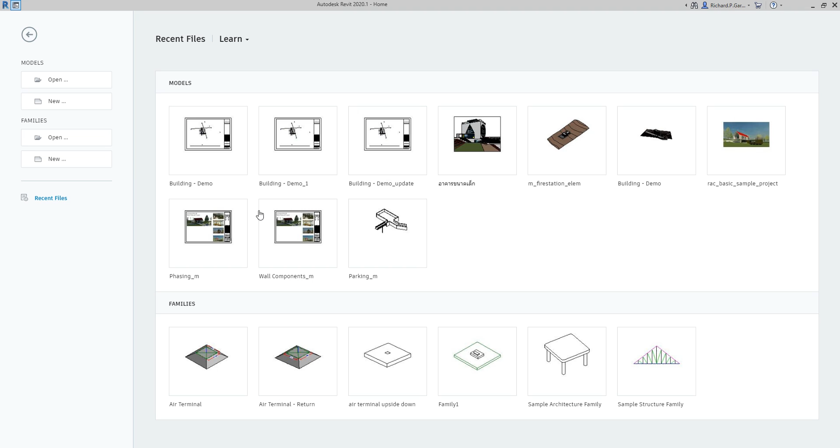Let me just move this away. So what I'm going to do is create a new file or a new project. The project will use an architectural template to start the project. So I select here, OK.

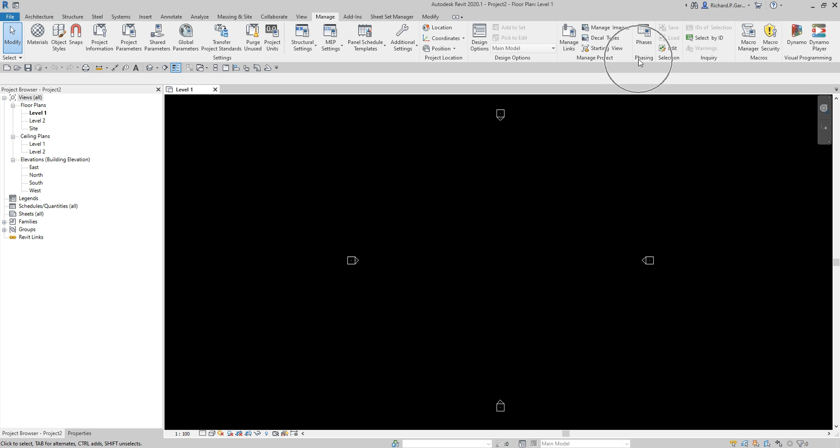All right, before I create the schedule, I'm going to select Manage, and then from the Phasing panel, you can see here the phases.

As you can see on the project phases, I have here two default phases: existing, and the other one is new construction.

So what I'm going to do is change the new construction to be Phase One. All right, enter.

Okay, and then I'm going to create another phase here. To do that, I select 'After', meaning for my number two phase, I select After here to create another one. So that will be called Phase Two. Okay, and so on and so forth.

As you'll notice on the project phases, this first portion here is the past, and the more you add a phase, that will become the future phases. So this will be the old phase, and this will be the newer phase of your project. If I add another one, this is the latest phase, and this becomes the old phase. So you can see there's the past and then there's the future. It's up to you how many phases you want to add to your project.

Okay, so this is just an example, to give you an idea on how to show our wall in different phases. Now the next thing I'm going to do is just select here.

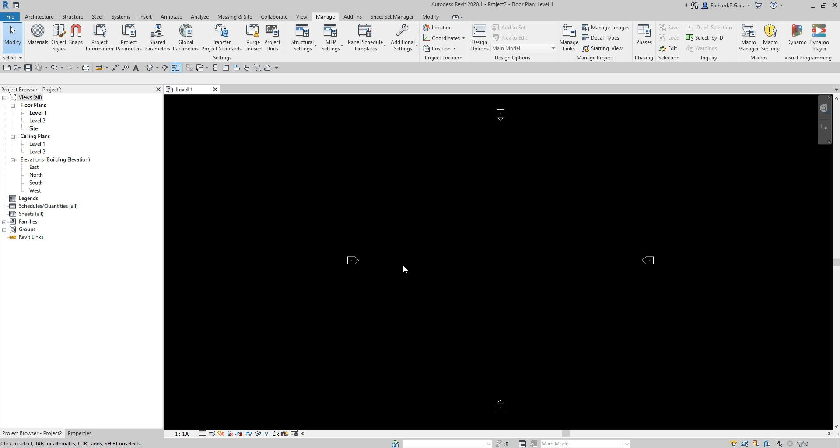Okay, there you go. And then as you can see, if I go to my properties here, I can see that the current phase is shown as Phase 1. So there's the existing, there's Phase 1, there's Phase 2, and I also have here Phase 3.

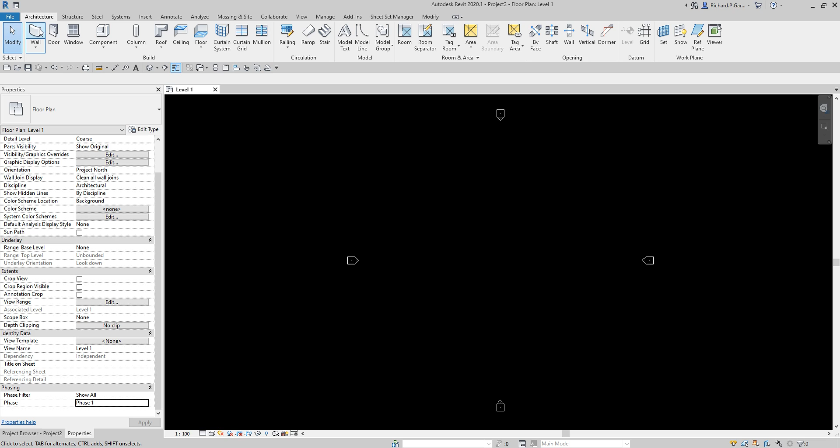Another thing, if I'm going to create a wall here, so there's the wall, I'm going to select that and create a wall here. Okay, so there's my first wall. I'm going to press escape and then just copy this.

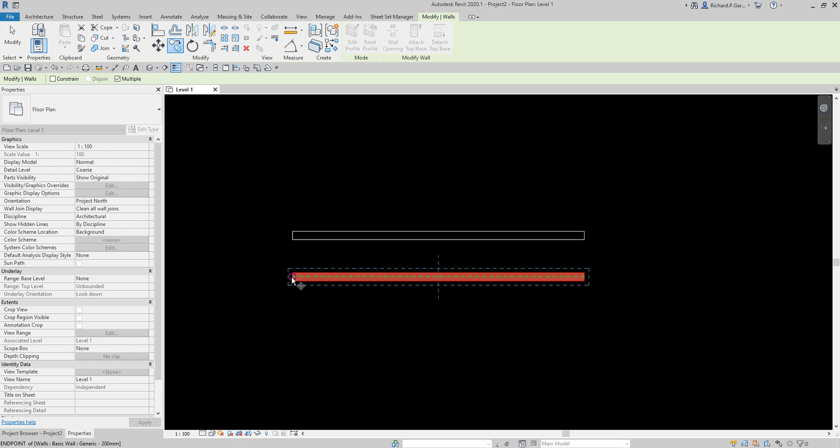So I copy that by selecting and selecting the copy here. Let us copy this. I'm going to make it multiple times, copy it a couple of times. All right, so I have four walls here.

So what I'm going to do is select one of the walls, and as you can see, there's this phase created. As you can see, if I click the drop-down arrow, I can see here all the phases. So what I'm going to do is just apply phases to these walls that I have created.

Okay, so just a bit of background: the reason why you are creating phases is so that you will be aware of what is happening on the project stages of your project.

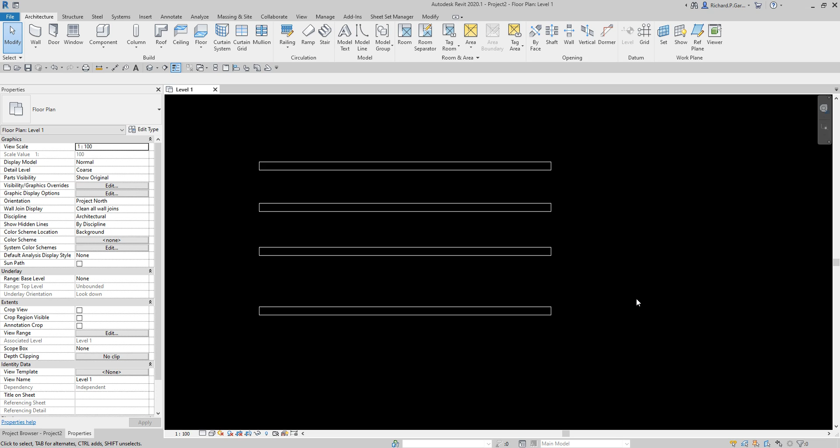Okay, you will be aware of the phases of the project. I'm going to select the first one and assign this to my existing. So there's my existing. Now I'll select this one, which is phase one. This will be phase two of my project, and this will be phase three.

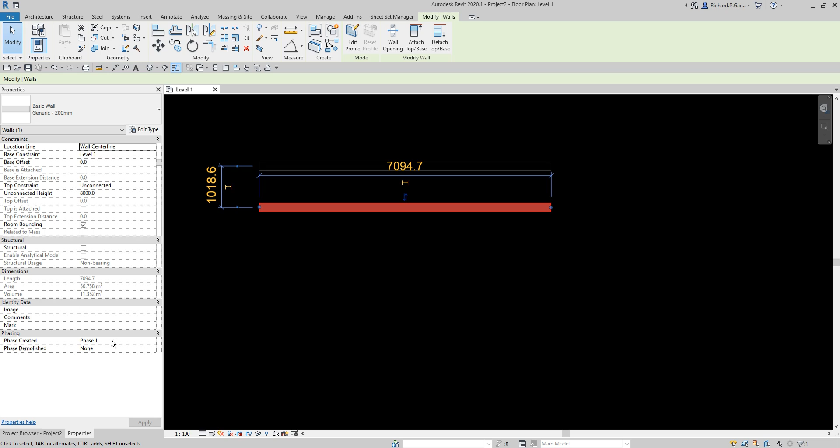So here I have the existing, and here I have phase one. The reason why the other two walls disappear here is because our current phase is phase one.

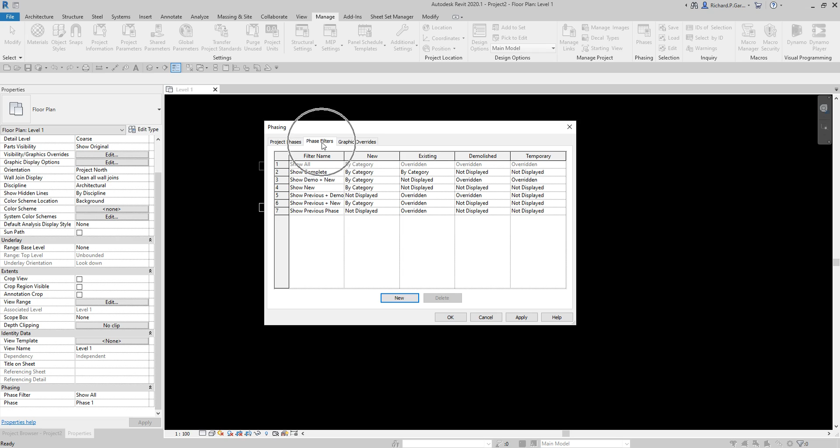If I go back to manage and select the phases again, I'll select the phase filter. As you can see, the phase filter is set to show all. So on my current view, on level 1, the phase filter here is show all. You'll notice that all the new elements by category, the existing is overridden, demolish is overridden, and the temporary is also overridden.

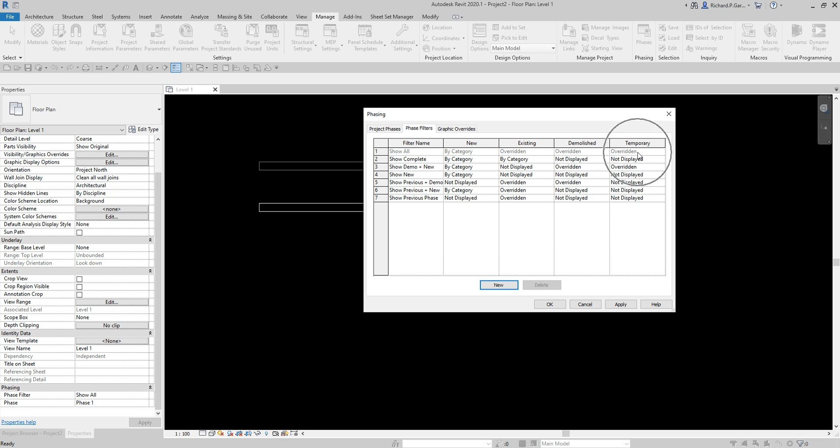Now if I go to graphic overrides, you'll notice the existing is colored gray. So the base of that is existing, and that's why my wall here is gray as well.

So if I change this to, let's say, blue, solid blue, and this one also solid blue. I'll select OK. Remember, this one is existing, right? So if I select OK, you'll notice it turns to blue.

So basically this controls the settings, the graphic overrides of your phases. Now what I'm going to do is for the phase filter, I'm going to select show all, show new... I'll use show complete.

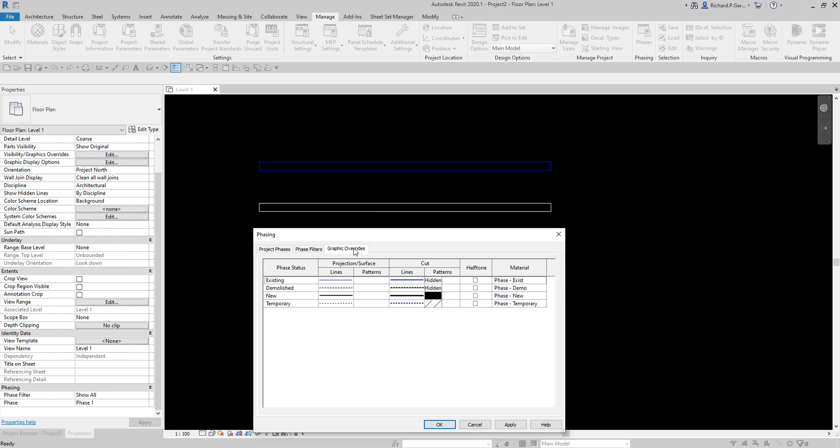So if it is show complete, it will show the new elements and the existing by category. So by category means it's not overridden. If it is overridden, that will be the settings on the graphic overrides. So if it is by category, that is the settings on your visibility graphic overrides. Just remember that.

So if it is show complete, it will not show the demolish, and it will not show the temporary either. So if I select OK, and then after that I'll select show complete, this is now what will happen.

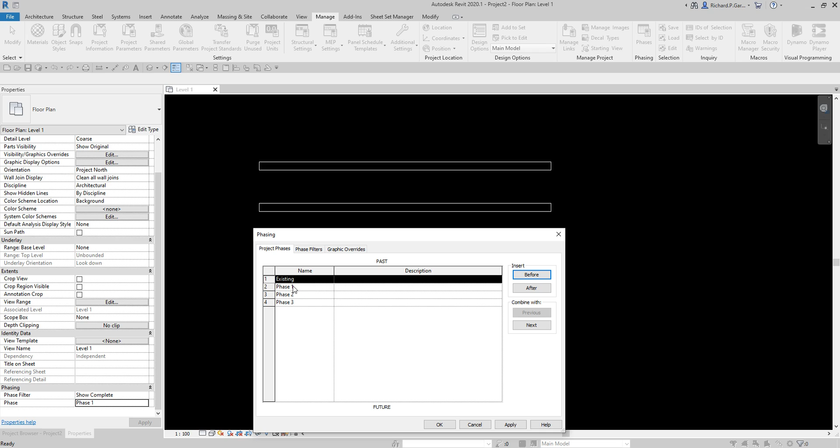So for phase one, like what I said earlier, if I go to the phase, phase one is the newer phase than the existing, right? That's why the existing here is showing and also phase one is showing.

If I change the phase here to another stage, which is phase 2, what will happen is it will show us the third wall. So if I change this to phase 2 and apply, you'll notice it shows the third wall. It's just logical that the future wall will not be shown here because we are only on phase 2 of our project.

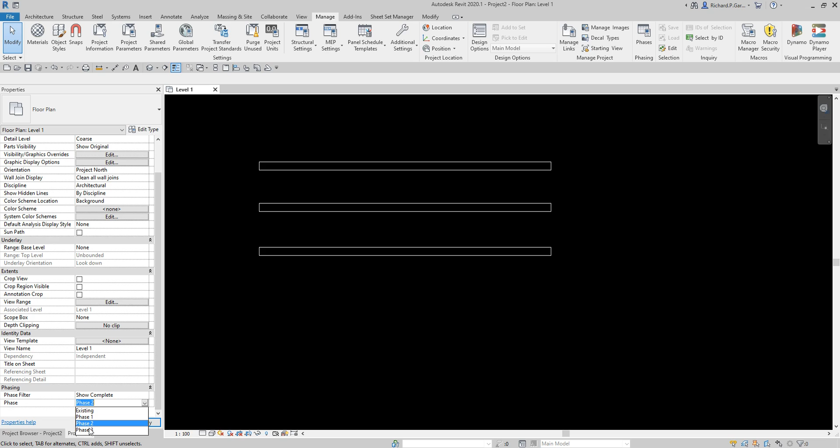So if I change this to phase 3, it will now show the last one. So basically that's how your phase works.

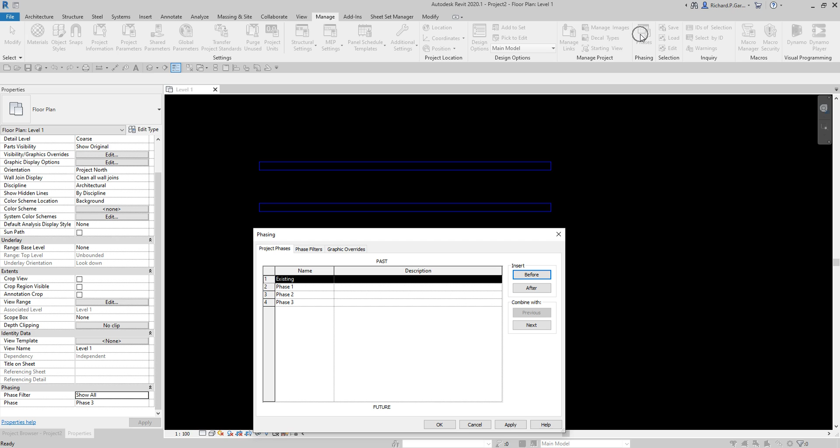So if I change this, let's say, to show all, as you can see, it's now going to turn blue. Why is it like that? Why is this last wall colored white while the other three are colored blue? Because if we go to the phases, and if I go to the phase filter, if it is show all, like what I said, all the new elements will follow the settings on the graphic overrides, which is this one.

The setting of this wall follows the settings on the graphic overrides. And the other three walls here become blue because on phase 3, they are already existing walls.

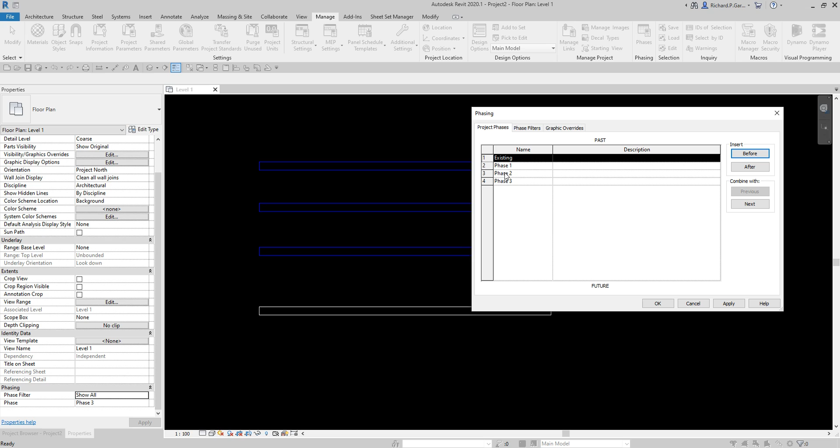So these are already old phases, right? This is our latest phase, phase 3. That's the reason why this one doesn't change to color blue because this is the latest. And then these three walls are already the past or old walls, the old stage of the project. That's why it's turned blue, because Revit considers them as an existing wall already. So hope that's clear.

So we can play around here. We can go to phase 1. Again, the other two here will disappear because we are only on phase 1.

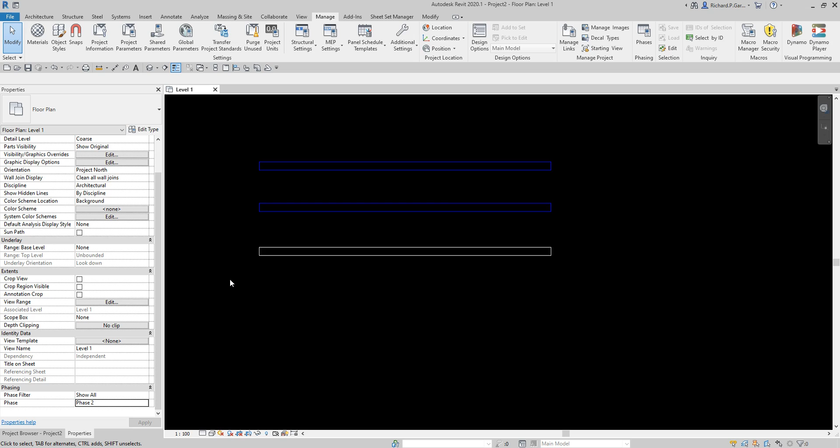If we go to phase 2, what will happen? So what do you think will happen? So the third wall will show colored white, and then these two walls will become colored blue. Why? Because on phase 2, this is our latest, and this will become our old phase or the existing wall.

So if you want to control the visibility graphic overrides of your wall, what I'm going to do is change the color of the new wall here that is under the latest phase. So like I've said, on the phases, when you say 'by category', that follows the settings of the visibility graphic override.

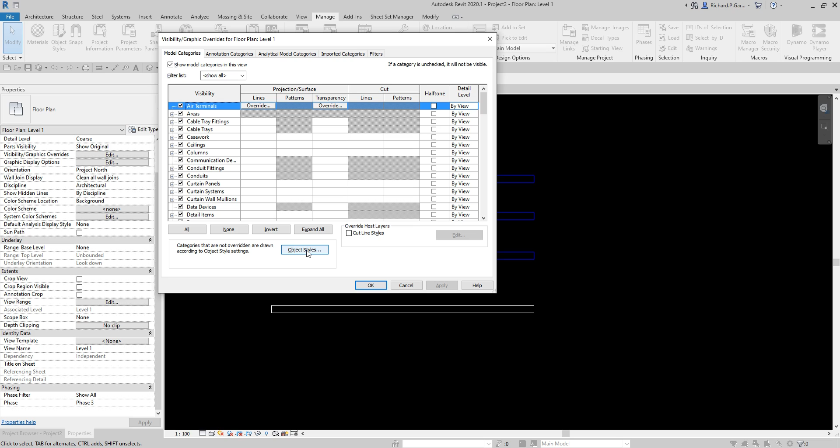So let's say, for example, I want the new elements to be colored green. I'm going to select edit, and then go to object styles, then go to walls, and change the color here. For example, that will be green for the new elements. There you go.

So it's colored green. So basically, when you say 'by category', it follows the settings of the object style here on the visibility graphic overrides. When you say 'overridden', it follows the settings here on the graphic overrides. Let me just put this back to its original state first.

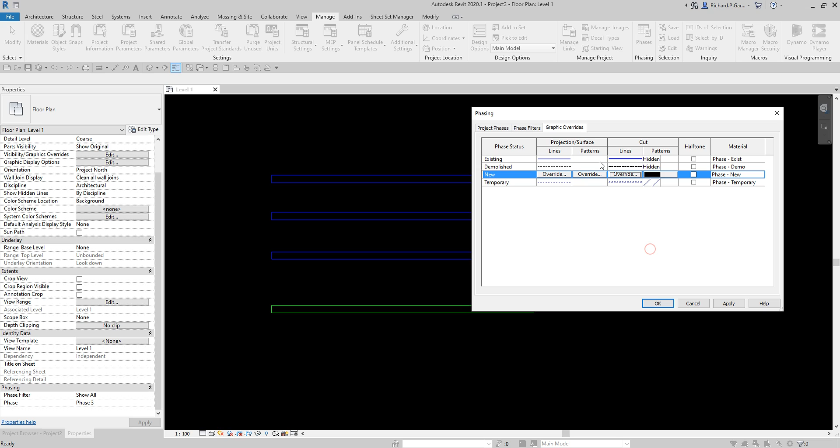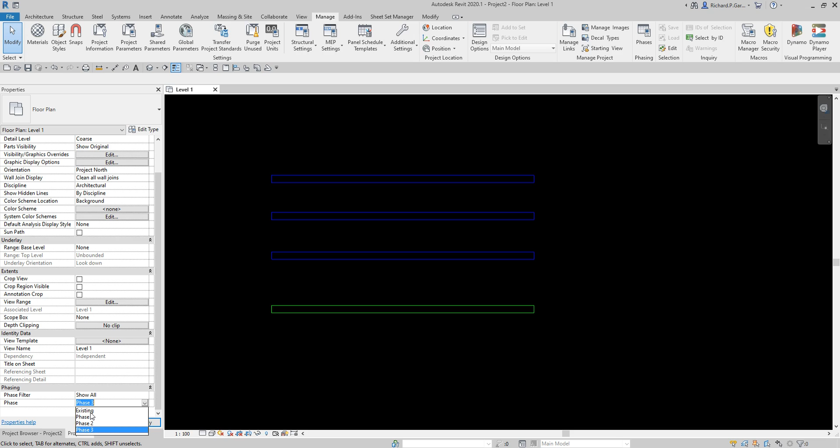So that's the idea. Overridden - that's the settings on the graphic overrides. By category - that's the settings of the object style on the visibility graphic overrides. So every time I change the phase, let's say I go to phase 1, meaning these two walls will disappear, this one becomes green, this one is blue. So I select phase 1, that's what will happen.

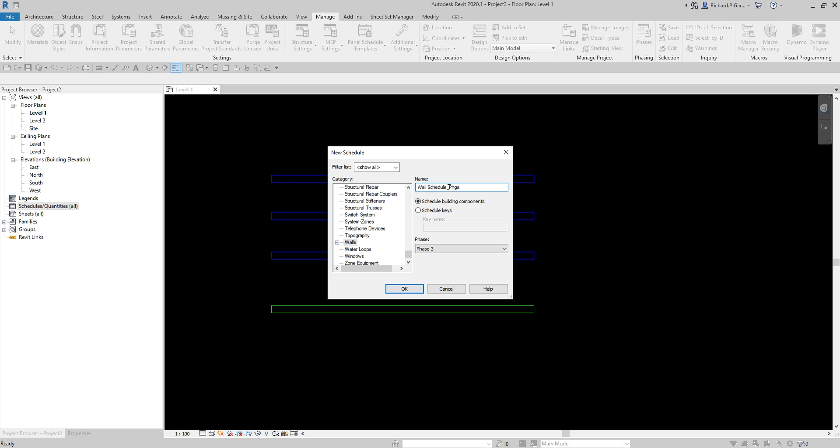Now if I want to show these elements on my schedule, what I'm going to do is create a schedule. I select here, right click, new schedule, and look for the wall here. I select the wall schedule. Let's say I select that on phase 3, that will be the phase. Wall schedule, you can name it phase 3. So phase 3, and then I select OK.

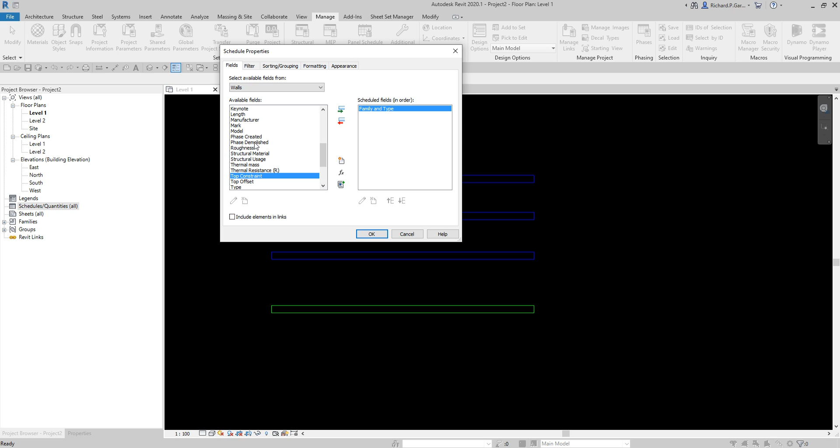Now, what are the fields that you want to show? I want to show the type - the family type. I'll just select family type, family and type, and then select the phase, which is this one, phase created. So I use these two, and then I'll just select OK.

And there you go. So you will now see your walls in different phases. So basically, that is the answer for the question from this guy here - how can you show phases in a legend? So instead of a legend, just create a schedule.

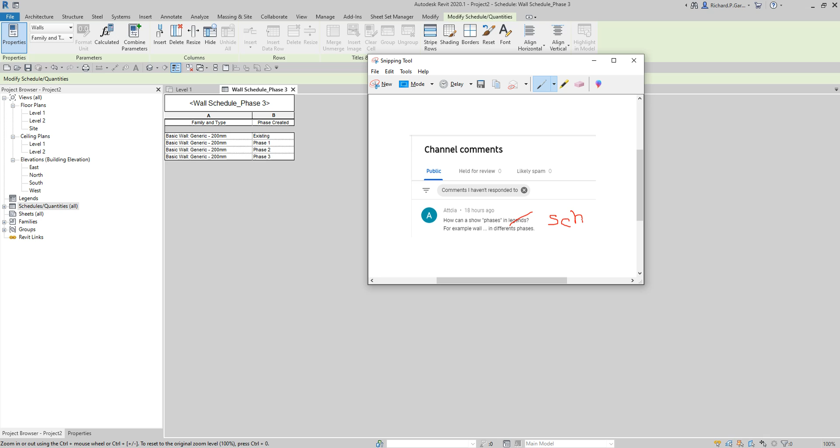Schedule, right? Okay, so as you can see, these are now the walls, and these are the phases created. If I use tile window here, there you go. So if I click this one, it will highlight in red. If I click this one, it will highlight in red.